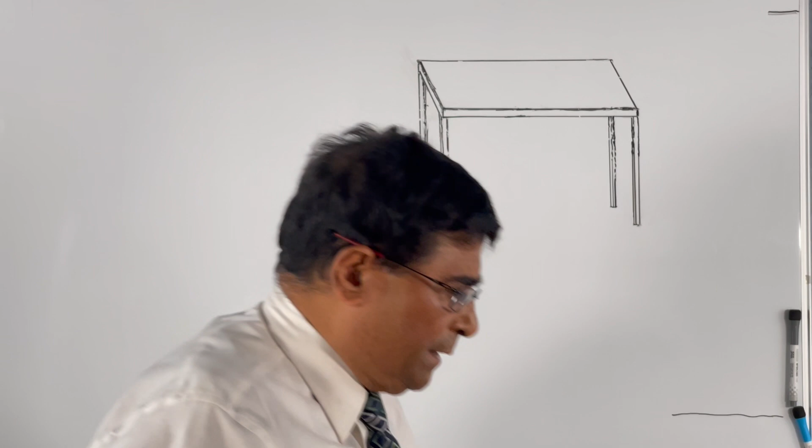This is a table, just an ordinary table. This table is not a structure. It can take load from the top, but if you push it from the side, it will move. I have already drawn this picture of a table on the board. But I want to make this table like a structure.

What I should do: if you put a load from the top, it will take the load directly to the ground, say it is the ground.

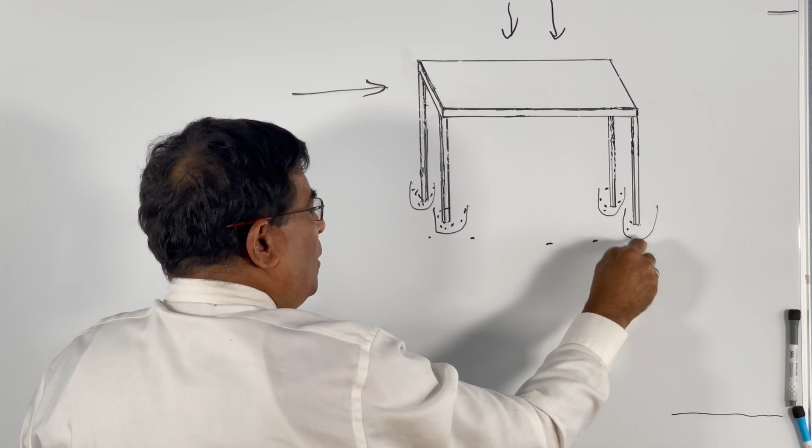But if you have a load from this side, lateral load, it will move. To make it stable, what I am doing is having some holes on the ground, and I fill it with concrete. When the concrete settles down, it will look like a structure, meaning it can take the load.

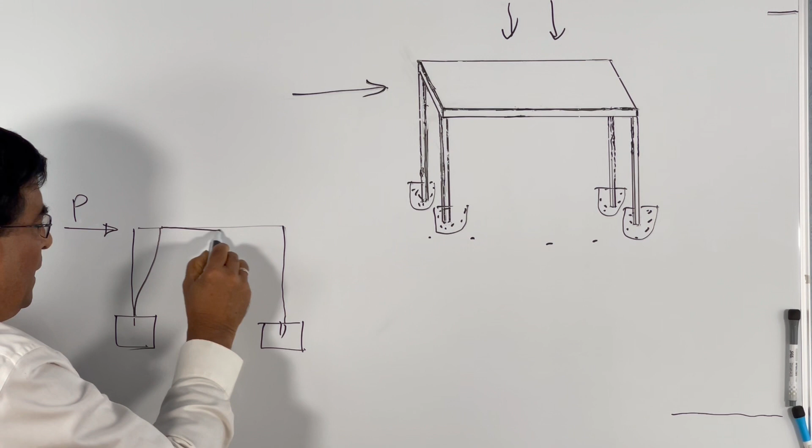Only problem is this joint here and there. To strengthen the joint, if I take this frame separately, suppose this particular part is something like this. When I put a pressure force there, P is the force, then it will try to sway like this. So that means these are not strong enough to take this load, this sway.

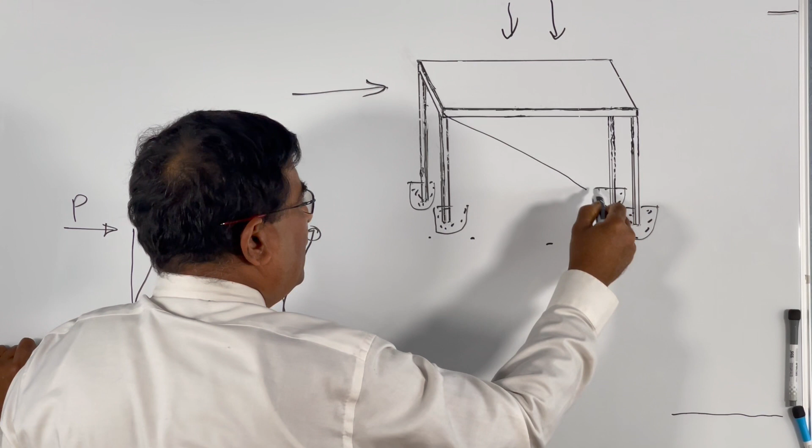To strengthen it, what I will do is connect this one with this place, connect this and that with some members. This member is called, I call it, bracing.

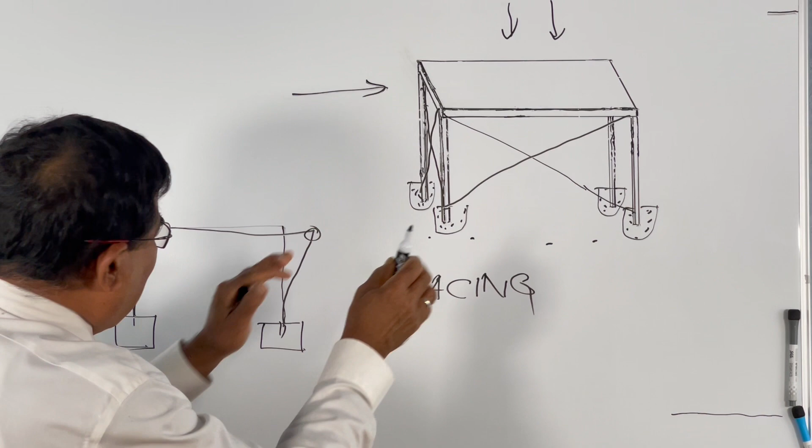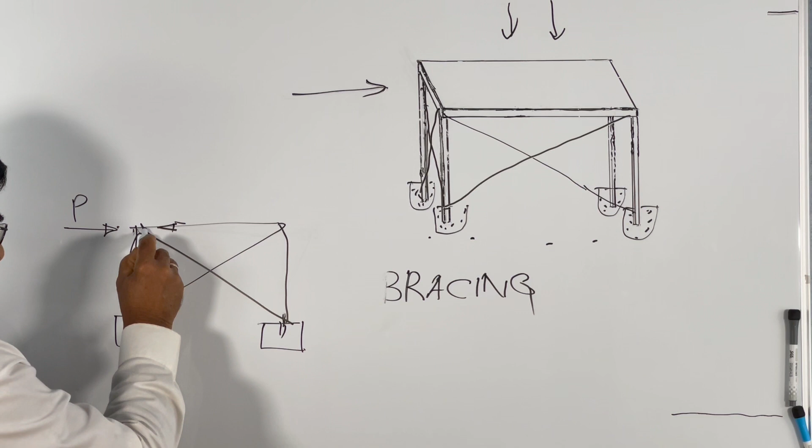So what the bracing does, it doesn't let it sway and move like this. What it will do is be like this, if you draw it properly. The force is there, part of the force will go here, part will go there. You see, I am drawing these arrows opposite to this force. Okay, watch it.

This is a force. If it is like this way, it will oppose this side. This will be something different, this one is something different. I'll draw it and explain. What happens is this P, part of the P will go here, so you can say R1, and part will go R2. So R1 plus, if this angle is theta, R2 cosine of theta equals your P.

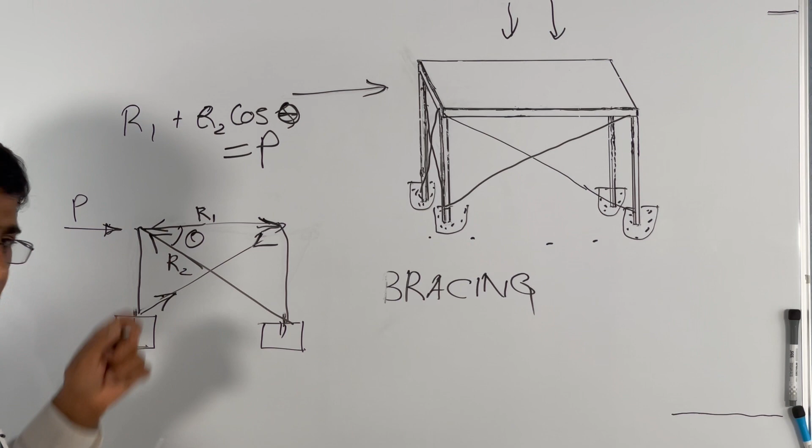That means P is resisted by these two members. These are the reactions coming on the member, that is the member forces. How do I know this? Because when you have some member, if the arrows are like that, we consider that member is in compression. This is compression. And if it is away from the joint, it is tension. Now here, this is compression, this is tension. How do I know it?

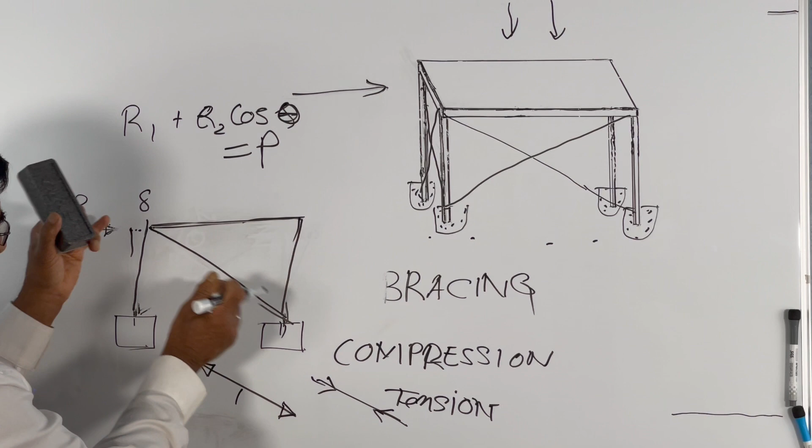Take this case. When there is no member like that, it will move like that, right? This is going like this, sway some amount at this point. So when I connect it like this, what happens? The distance between this and that shortens. When I add this member, it tries to push this member because it tries to make it short. So this member pushes it back. That means when the member is under compression or pushing inside, there's compression, so I know this is in compression. But the other side, it is lengthened. The distance from here to here is increasing.

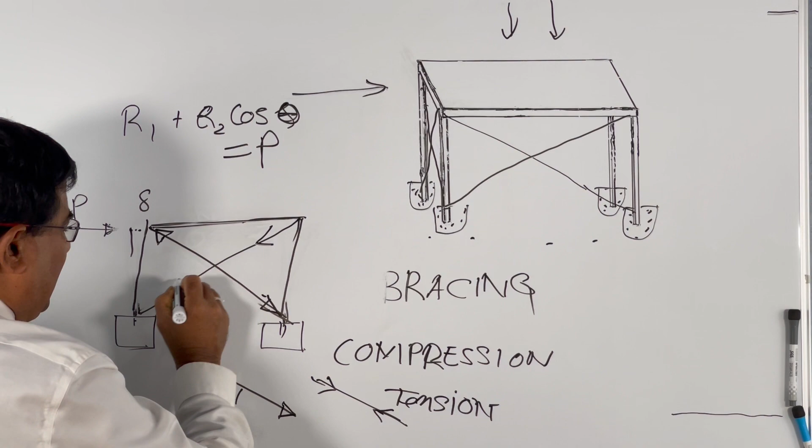When I put the member like that, what will happen? This member will try to elongate by this action. So it is under tension, it's pulling. So this is something like that. By looking at the behavior of the structure, we know the characteristics of a particular member under the load. I will explain about this.

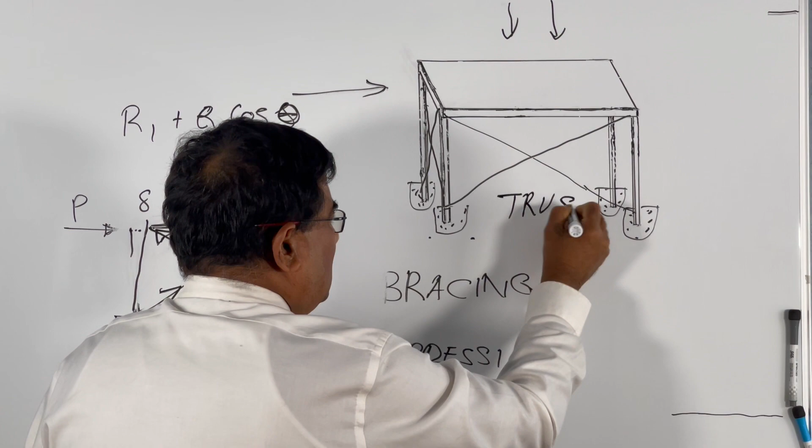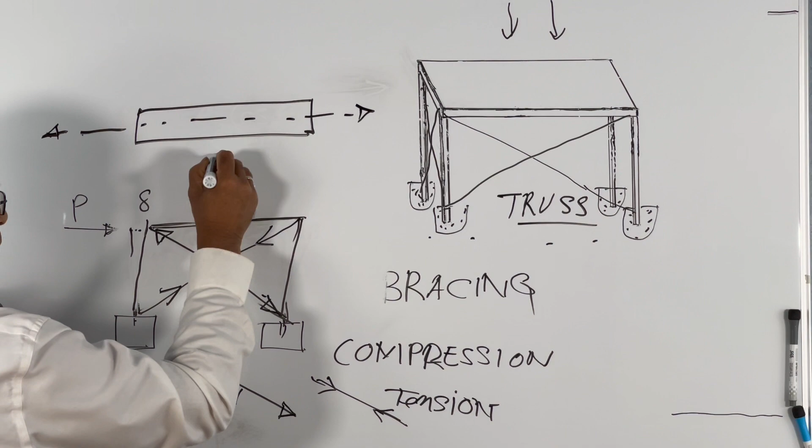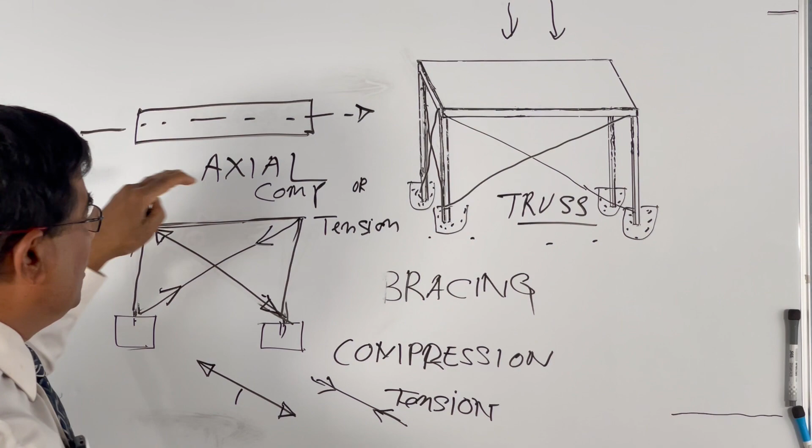This is a truss section. This type of member, when I add this frame, this is a truss section. Truss section is something like that: when the force is transferred through the axis of the member, suppose this is a structural member, when the force is along the axis, this is called axial force. It doesn't matter if it is tension or compression, it may be either. In the case of a truss structure, all the forces are axial, either compression or tension. This is the characteristic of truss.

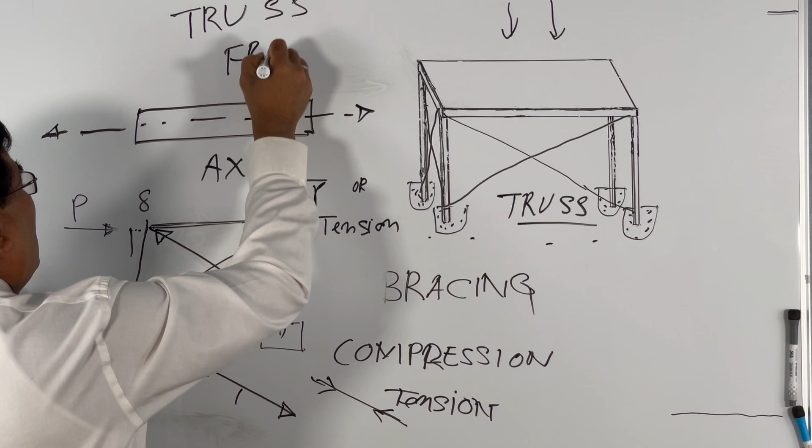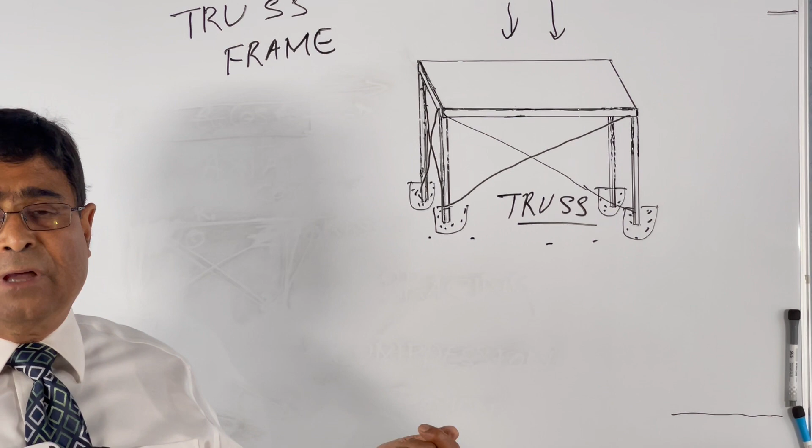We have got truss and frame, which I am going to explain now. What is frame? This is a truss, this side with the bracing we make it a truss. But you can consider this is a building, the whole thing is a building, not your table. Just a table demonstration, I am showing it to explain. No one will have a table as a structure, believe me, because people have structures for some purpose. This small table, if you fix it like that, it has got no use, nobody is going to have something like that. So consider this whole thing is a building.

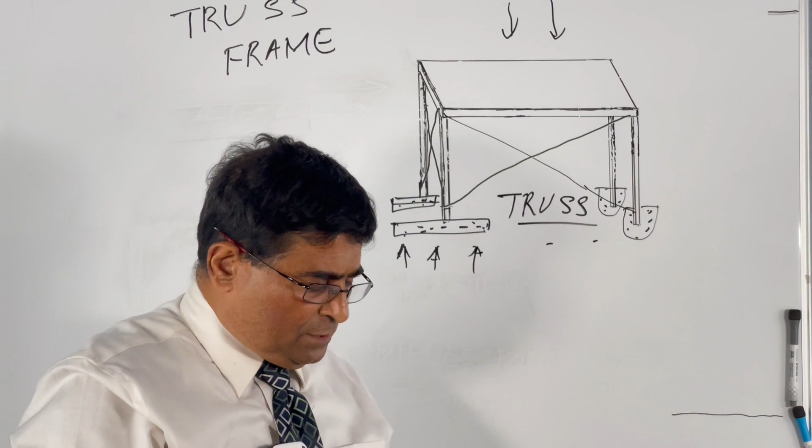In a building, what do we have? We have got a foundation, and that foundation will be made wider a little bit, because the loads coming from a building are very high. We make it like this so that it distributes to a wider area, so that the reactions from soil can easily take the load. There should not be punching. Punching means if it's going through the soil, something like that, it is not allowed, so we make it distributed to a wider range. So whatever, this is the foundation, similarly this is called foundation. We make it wider.

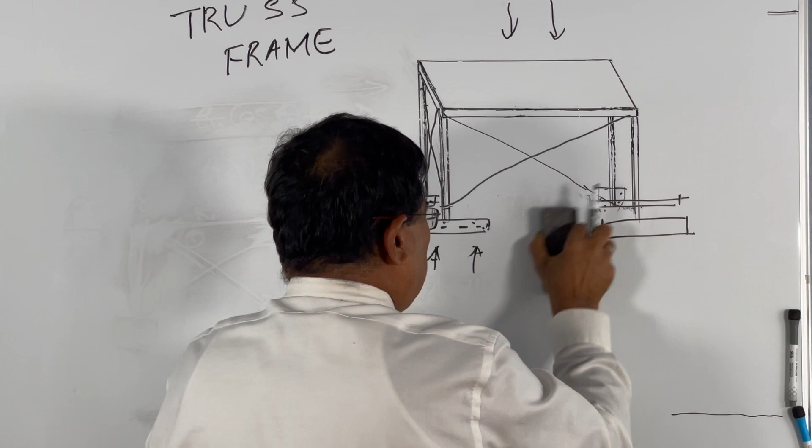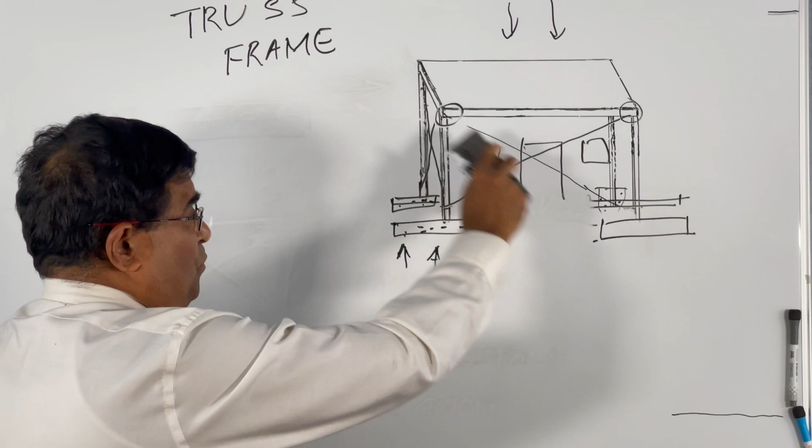But one thing, in a building, you need to have doors and windows. If you have a bracing like that, there's a conflict - you can't have the doors and windows. So what should we do? We have a special arrangement: we make this joint strong enough without having bracing. We cannot allow bracing in that case, in a building.

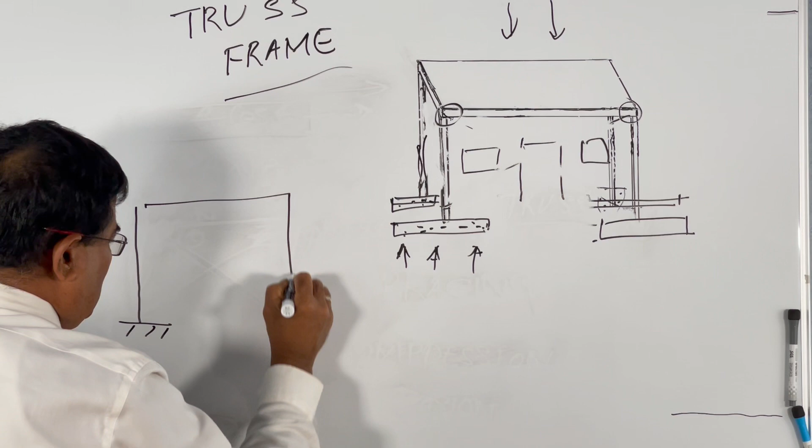So what happens? This type of structure without bracing is called a frame. The frame is something like that. This is a moment resisting joint - there's a joint from this member and that. So what is the characteristic of the joint? When you apply some force, the angle between this member and this vertical member is 90 degrees. This is also 90 degrees.

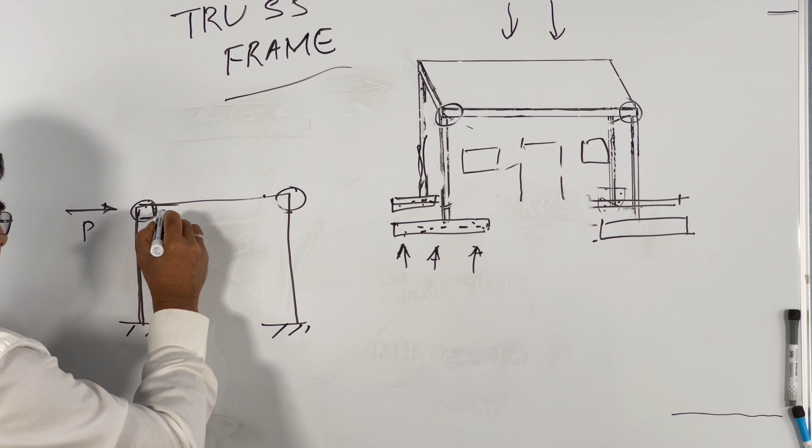So what happens when it's under load - it will sway, like this. But the angle between this remains 90 degrees in a frame. So it will be deflecting like this. This angle remains 90 degrees.

That is the characteristic - when you do not allow rotation, that means there is no difference in the rotation between one member against the other, then a moment is developed. Resisting moments - I will come to that later.

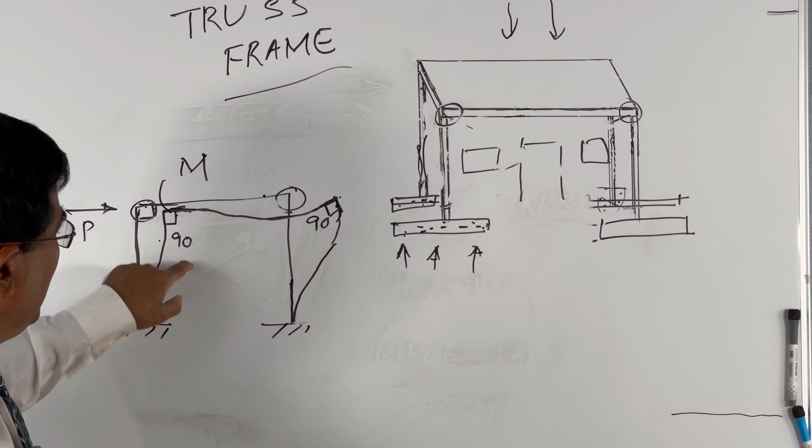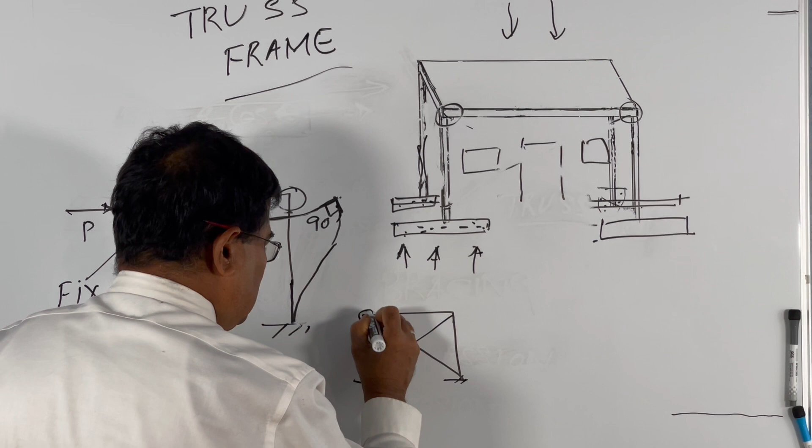But this is the difference between a frame and a truss. The frame, this is fixed - in most cases, sometimes hinged in special cases, but mostly fixed. But in a truss, you see, this is not moment resisting - we consider them hinged. They can rotate; the relative angle between the members may not remain the same. So that is the difference.

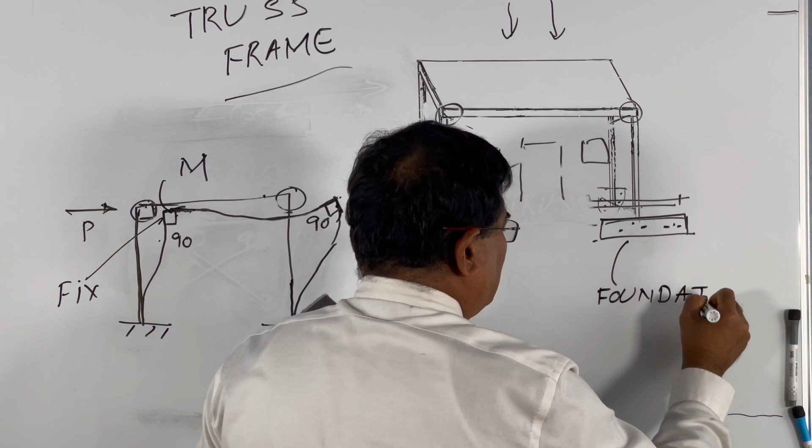Now, as I told you, suppose this is the building. In the building, as I told you, this is the foundation - we call it foundation, meaning it takes the load and transfers it to the ground. What is the name of this? This is column.

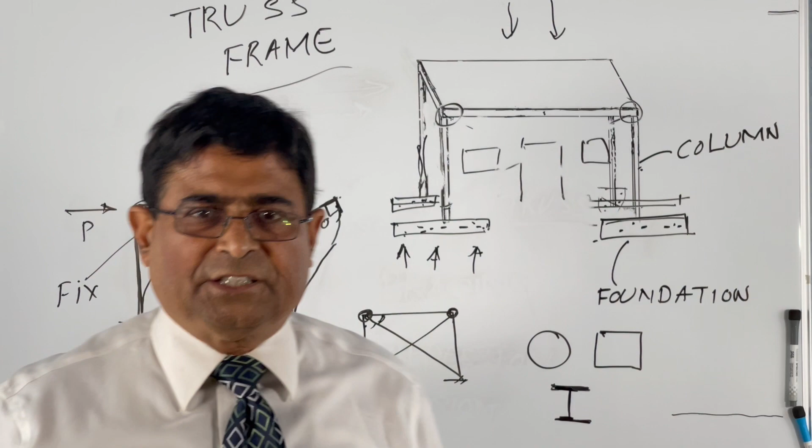These are members. The column may be circular. If you have the cut section, it may be rectangular, or it may have a shape like this if it is steel. There is the major axis, minor axis - all those things I will discuss later.

So this is a beam. If it is concrete, usually concrete we have a rectangular shape - this is depth, and this is breadth. Usually the depth is more than the width or breadth. Then we may have this one - this beam may be of steel, mostly a section like this. This is your beam.

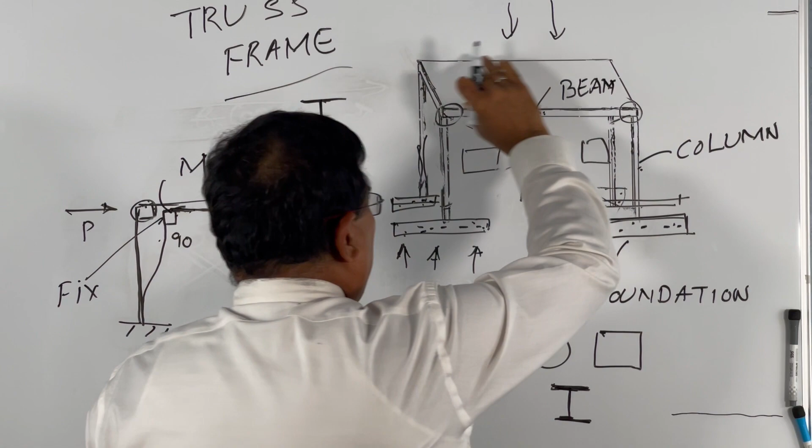And the top part, which covers the whole building, is called slab. Now what happened? This is mostly in slab - it is made of concrete in most cases. In bridges also you will find the concrete. The slab is always concrete, but the beam may be of steel or concrete.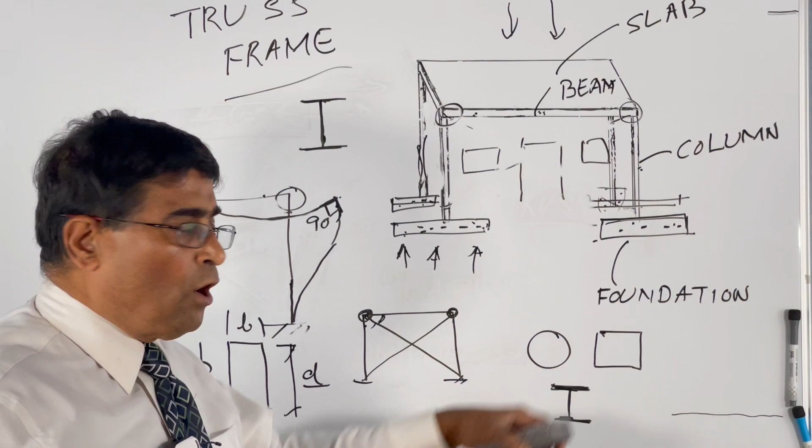And the columns also, as I told you, may be steel or concrete. And foundation is mostly concrete. There are different types of foundation. This foundation I am showing you is called shallow foundation.

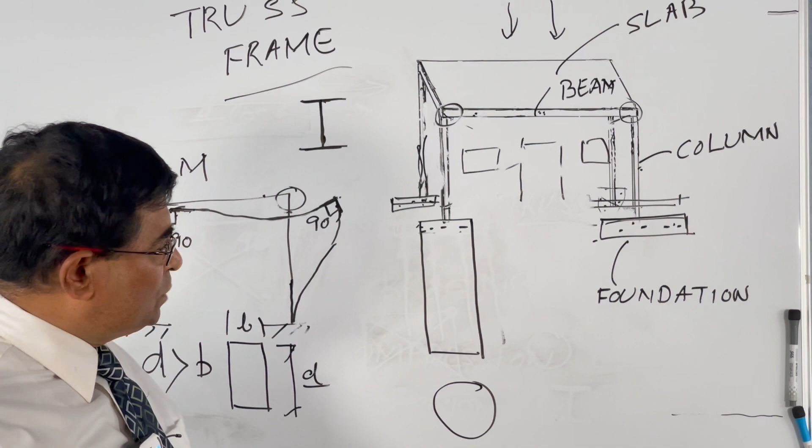It's shallow, but we may have deep foundation also - we have piles underneath. If the soil condition is very bad, we use piles, called deep foundation, or we can have caisson or drilled shaft. This is circular in shape. In bridges you will find mostly the drilled shaft or the piles. This is a drilled shaft.

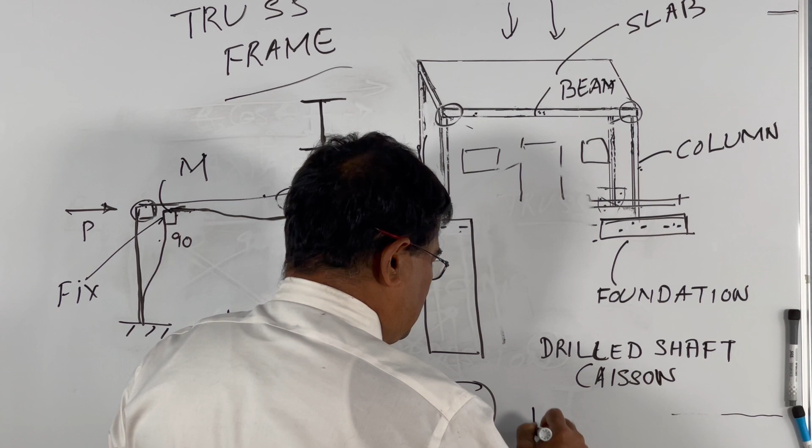Or caisson, and piles. This is also called caisson. But piles are also used in bridges, and if the soil is good, we go for shallow foundation also in bridges. This is all about structures.

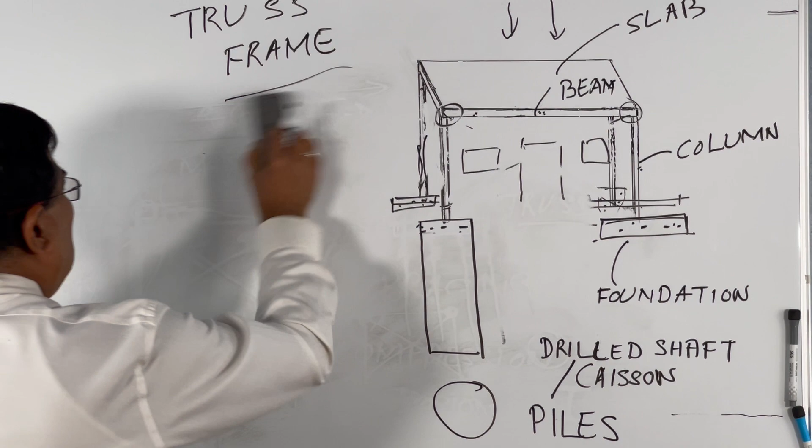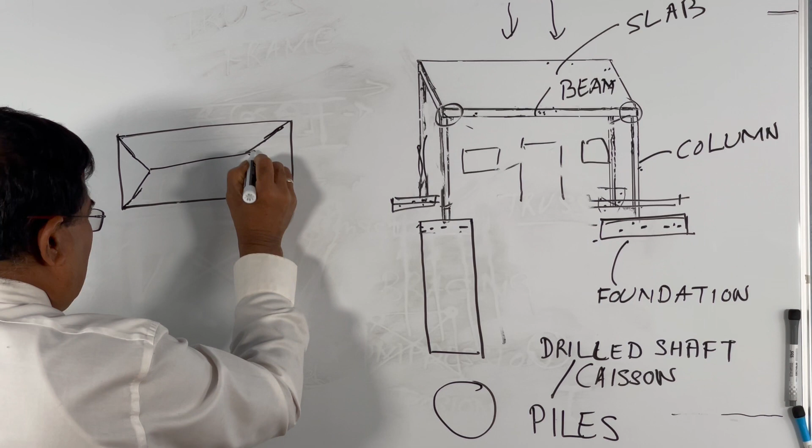So what happens - you see an interesting point. This slab, you see, the top part is a slab. I am drawing the slab in this shape. What happens? This slab's load goes to the beam. How? If you divide this angle, 90 degrees into 45 degrees and 45 degrees, these two lines will meet here, these two will meet there. If you join them, this part will go to this beam, this part will go to the beam here, and this part will go to the beam there. This is the tributary area.

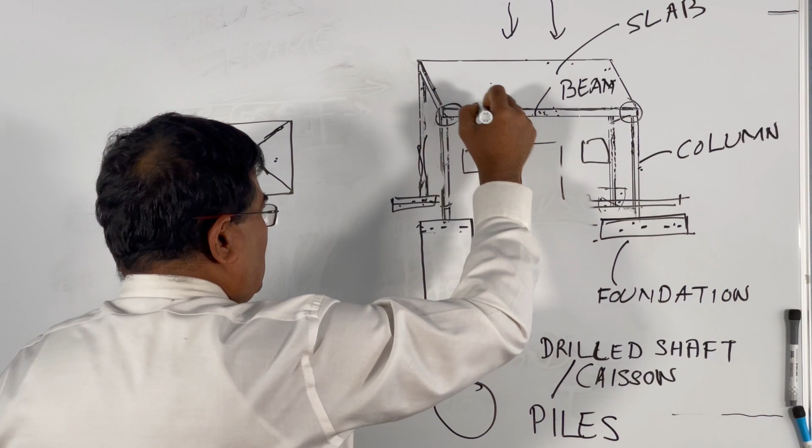So what happens - the load comes from the slab to this beam and that beam. That beam eventually transfers the load to the column, and the column eventually to the ground. So the way the load is passed from top to bottom, the path it follows is your load path.

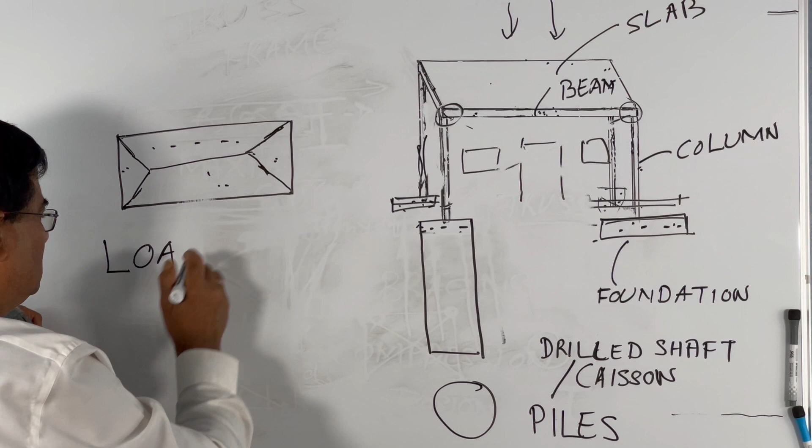Load path is the load that comes from top all the way to the ground, where it follows. So here from the slab, it goes to the beam, transfer the load to the column, goes to the foundation. Why is it important?

It is simple. In some cases there are primary members and secondary members. Take the case of a bridge. There are two big girders looking from top. So there are some cross floor beams also, then there are some stringers. Stringers means smaller beam. This is the bigger beam, and these are floor beams.

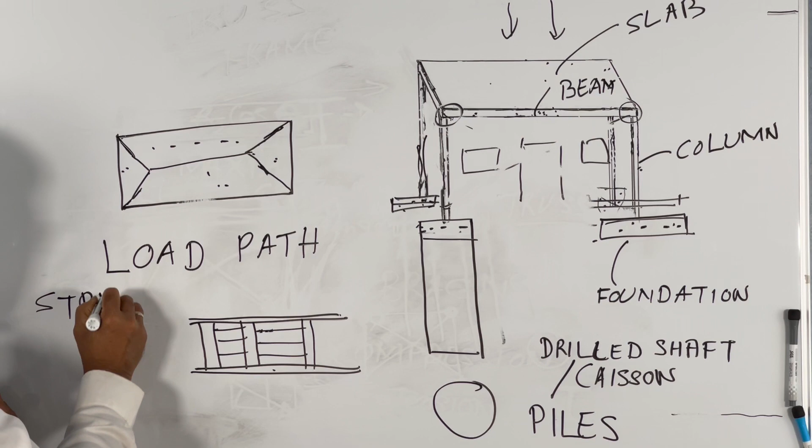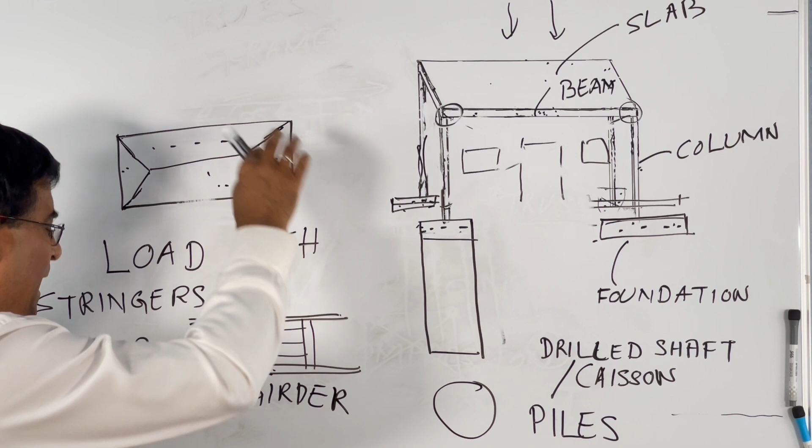So from the top, this slab, the load goes to these beams called stringers. The stringers pass the load to the floor beams. The floor beam transfers the load to the girder. So this is the load path. From top, the slab passes the load to the stringers, stringer passes the load to the floor beams, floor beam eventually passes the load to the girder. So this load path is important.

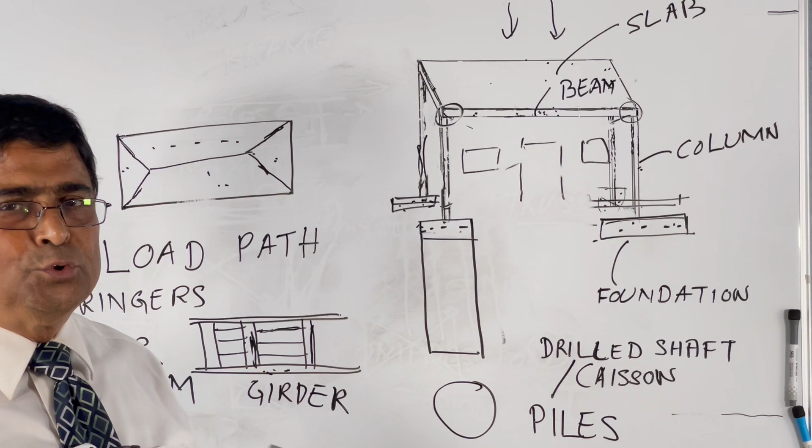Once you know how the load is transferred, it is easier to understand, easier to analyze the structure. You know which is the primary member, and these are secondary members. We should be careful about the primary member, because all the load will be carried by it. If the primary member fails, everything goes down. That is very important. So this is all about load path.

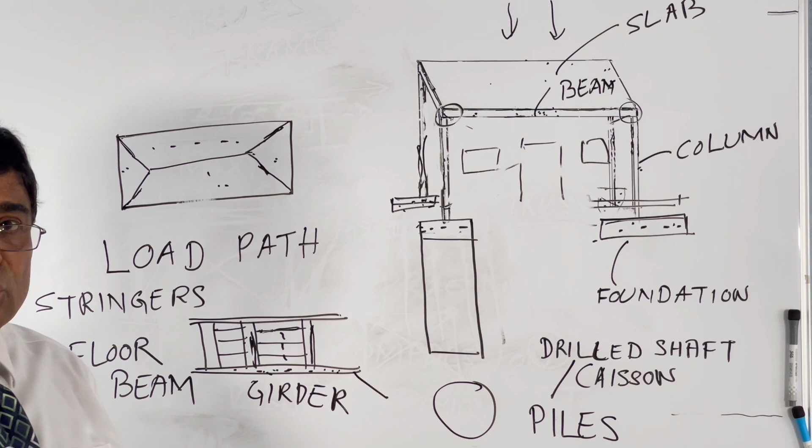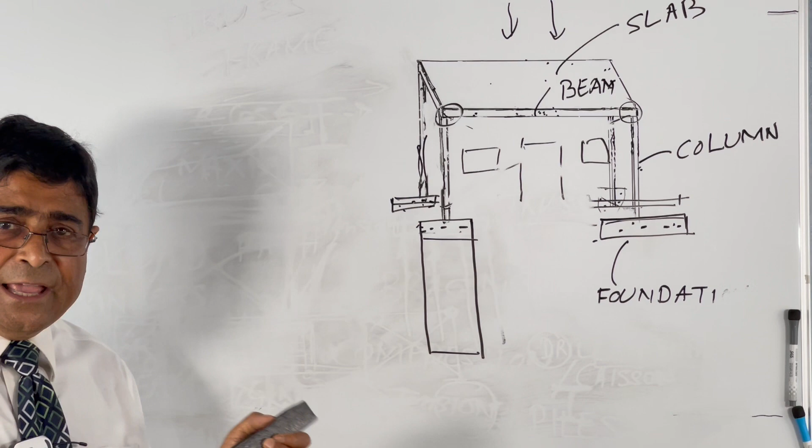Now, this is all about the structure, but why is structural analysis important? Why is theory of structure important? I explained the structure, so now theory of structure. What is theory of structure? That is important.

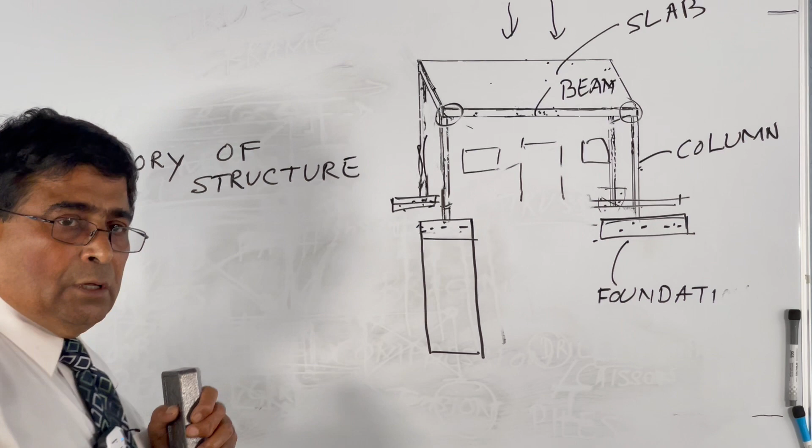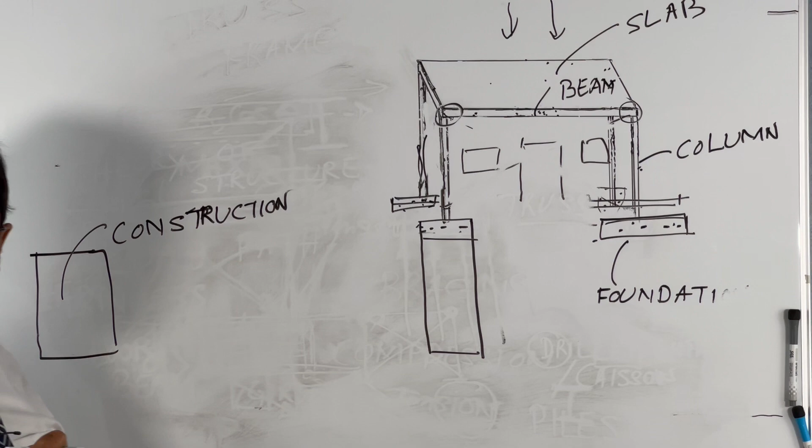Suppose you have a construction, you want to construct a structure. This is the construction part. You want to construct something, some structure. So what do you need for construction? You need some drawings. What are these drawings? These drawings are something like this.

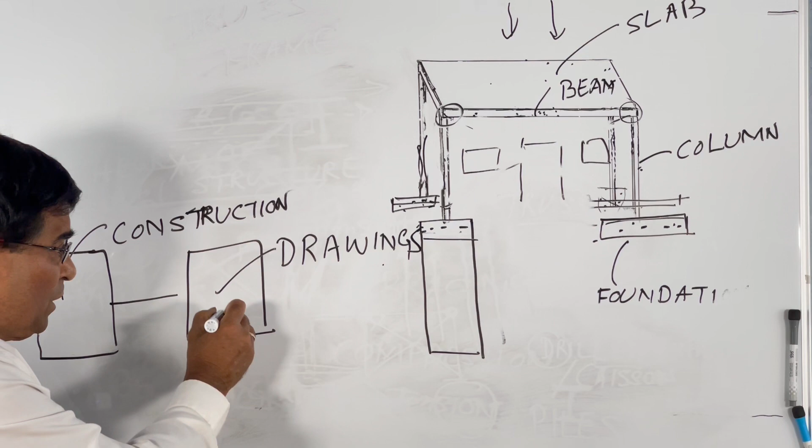This is the drawing we, in our company, made with the help of a technician, a draftsman. So these drawings we need for the construction. Otherwise how will the people who are constructing know how to construct, what is the size of the members, what are the dimensions of the members? They always follow the drawings. So when they follow the drawings, what will they do?

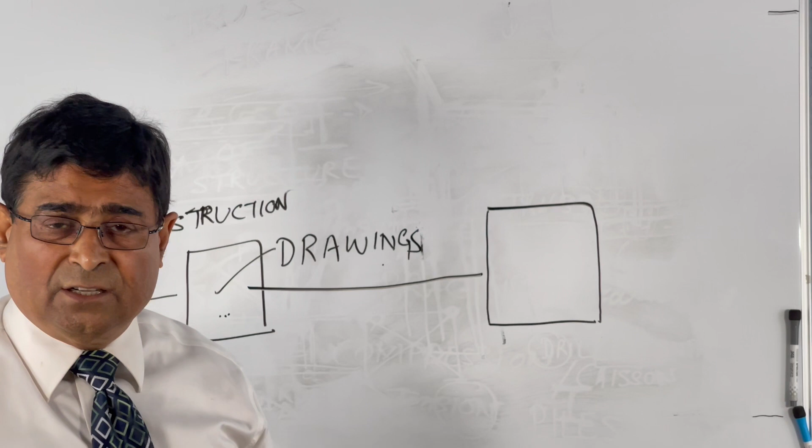How are the drawings arrived? How can you make the drawings? Drawings are drawn by some engineers, right, and a consultant. I'm a consulting engineer, a design engineer. So the consulting engineers or designers, what they do is they have the dimensions of the structure: length, breadth, width, height, whatever it is, in a bridge case the span, all these.

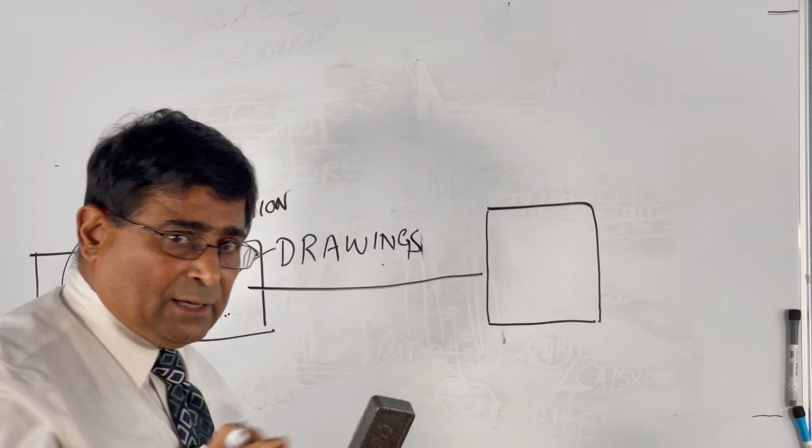What they will do is have a computer model. They put it in the computer. There are different kinds of software. They put it in the computer, and the software will model it assuming some member size. And they analyze it, it's called analysis. So at this stage, first you assume the sizes, then analysis.

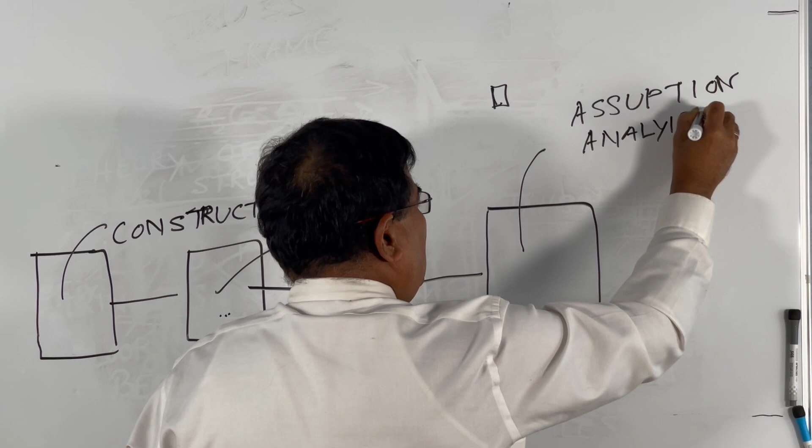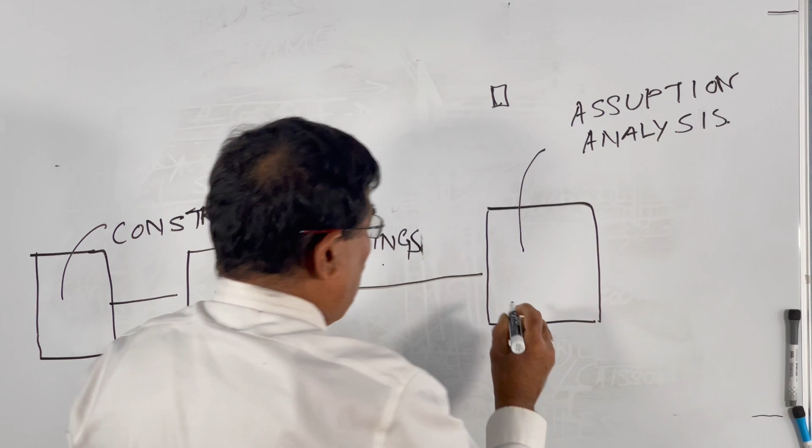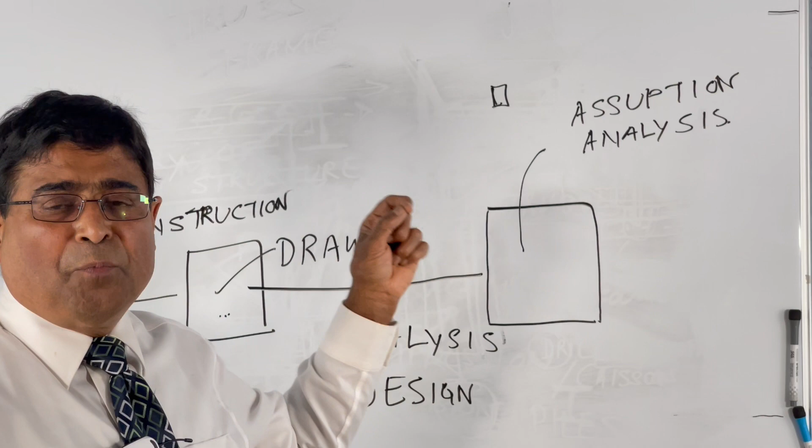Then when the analysis finds the members assumed are not sufficient, they increase the size and analyze again. So this is analysis. And design. What is design? Design is finding out the member size, the rebar, or whatever is needed there, that is called design.

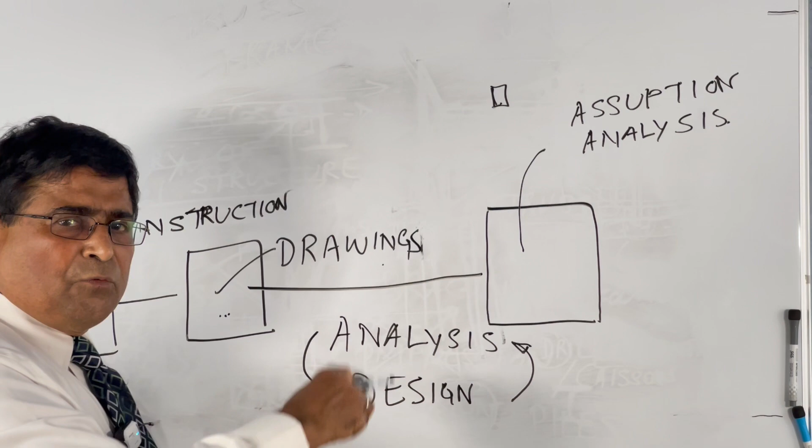So this goes back and forth. They analyze it, then after they design it, if it is not safe it goes back to analysis, then again comes back to design. This process goes on for a while. Eventually they arrive at a safe structure, meaning all members are safe, they will not collapse, and deflections are also reasonable.

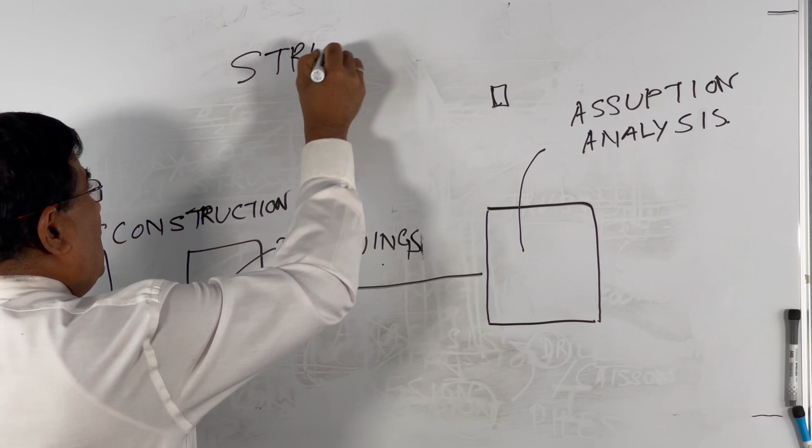Deflection. Two important points you should remember in structural analysis: stress and deflection. I will explain what stress is and what deflection is. These are the two important things. The stress is, you see, when you apply some force on a member, on a structure, suppose this is your structure, you apply some force. I told you earlier that there is a force here, there is a force there.

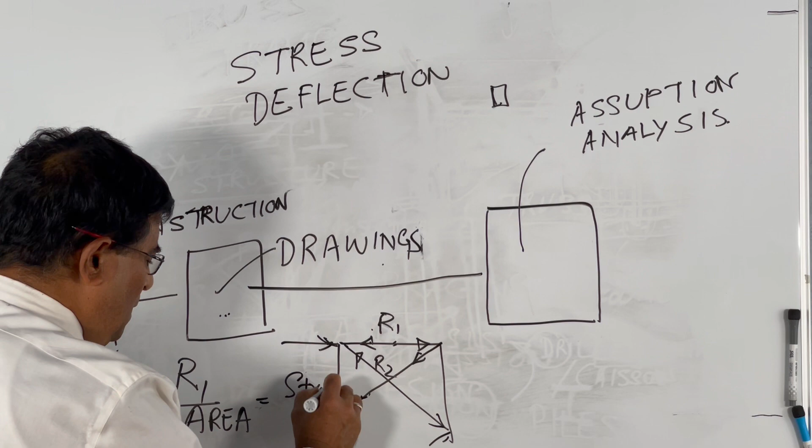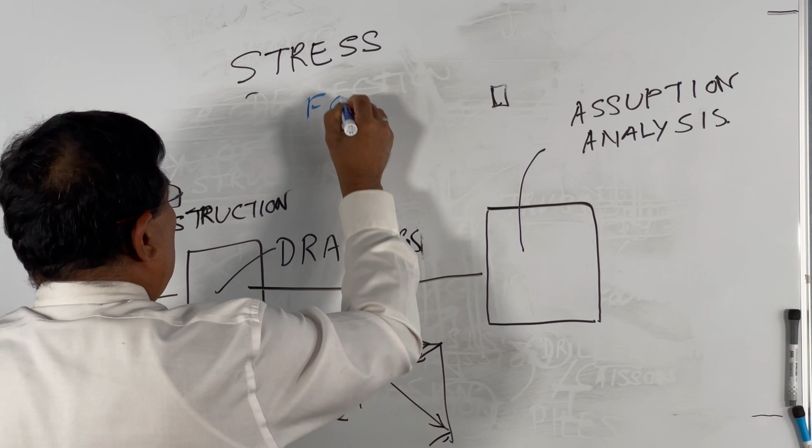So what happens? This force, I told you, is R1, this is R2, okay. So R1, if you divide by the area of the cross section, that is your stress. The stress is actually force per unit area.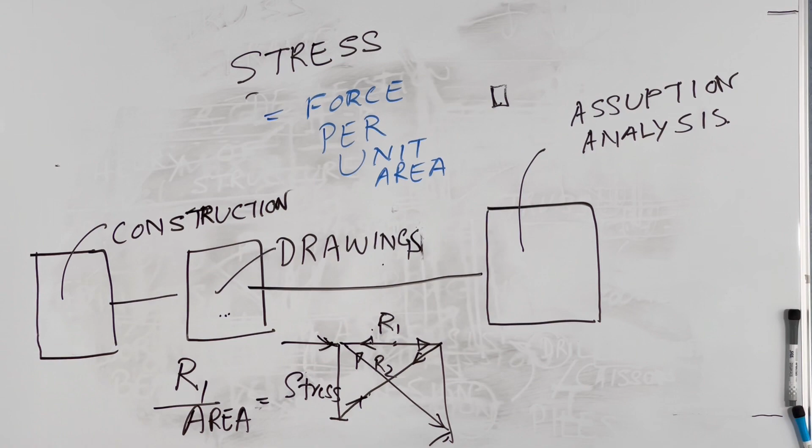This is the definition of stress. And deflection is, if you have something like this, some beam, it goes down, right? When I bend it, the part here is the maximum going down.

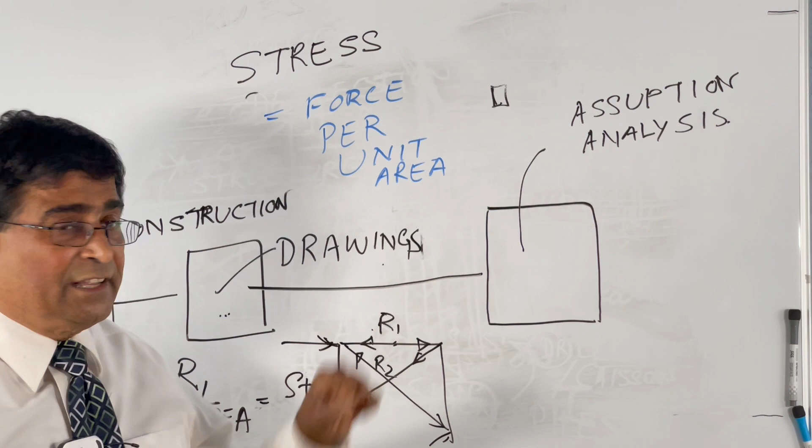That is the deflection, how much it deflects. This deflection and stress are both important in structural analysis. Structural analysis means finding out the force and stresses, stress and deflection, and deflection.

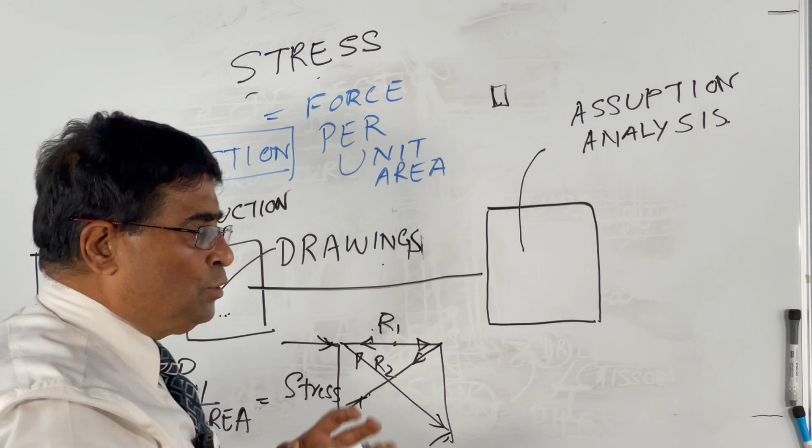You need to know about the structure. You need to know the behavior of the structure under all these loads. Where you find that, that subject is called theory of structures.

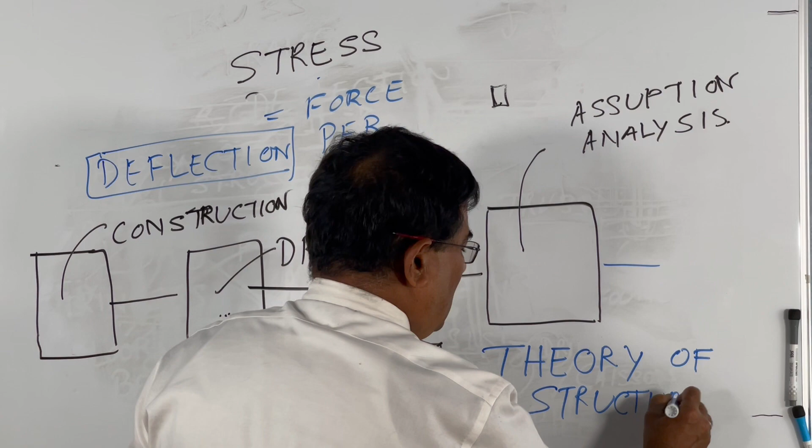What is theory of structures? It gives you all the theories that help you find knowing about the structure as well as analyze the structure, finding out the stresses, finding out the deflections. These are very important for structural analysis and for designing a structure.

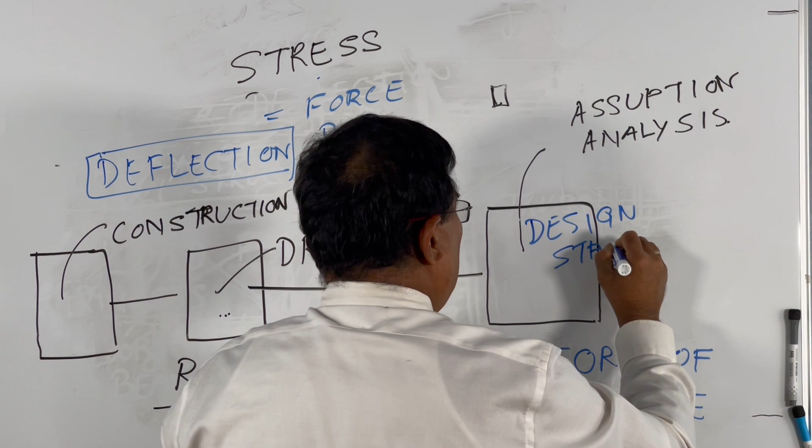So what is there? This is the construction, this is drawing, this is your design stage. And this design stage we use both design and analysis of the structure go hand in hand. After that, when we are satisfied with the design, we prepare the sets like this.

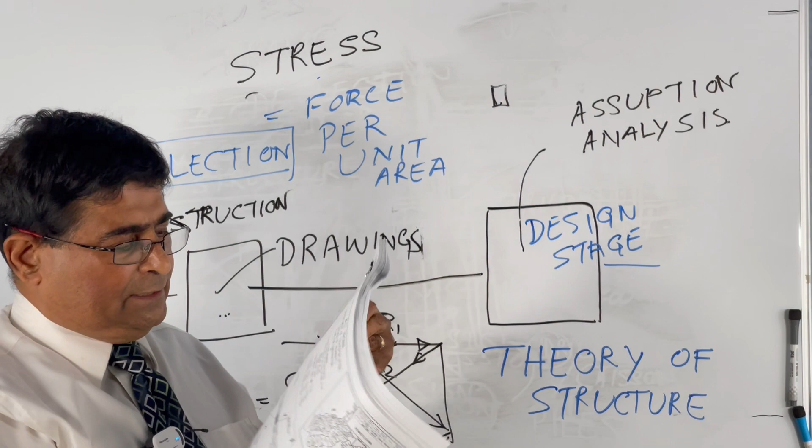We have to have a drawing like this. This is called plan. We call it plan.

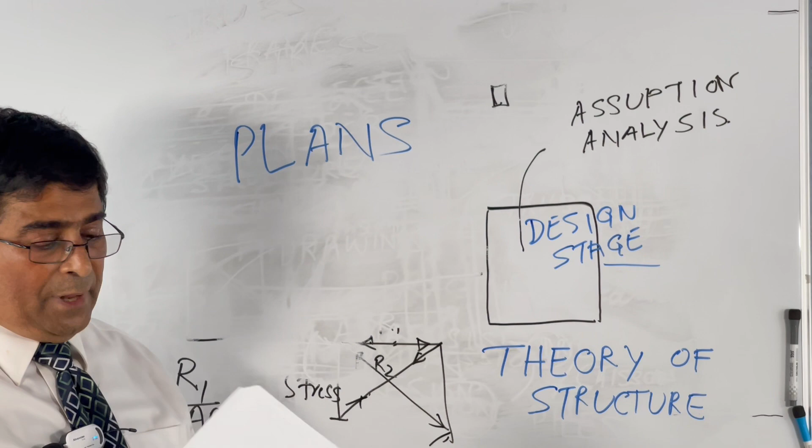These are untitled construction plans. There are many, here probably about 56 pages. You see, after designing, the engineer has to sign. Here it will be my signature, which may say the professional engineer. And here the roadway engineer has to sign.

This is the bridge. It's a bridge of 75 feet span, single span bridge. From here to here, it is 75 feet.

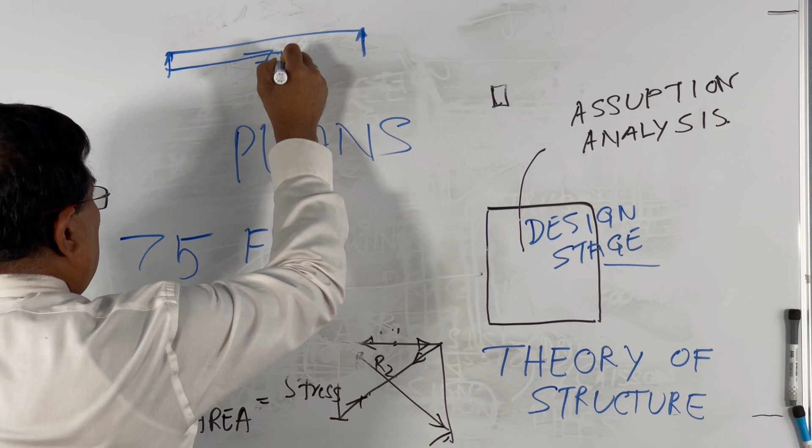Understand? So we need to come up with a plan like this so that the construction people can easily construct it. How can you do it? An ordinary person cannot do it. We should know about the structure, we should know what are the stresses and deflections, because the structure cannot exceed the allowable stress.

That's important, otherwise it will collapse. I will discuss in a later class what is allowable stress, how far we can go, the different kinds of design, all this. Then the deflection. In bridges, we cannot allow the deflection to go beyond L over 800. This is the empirical formula.

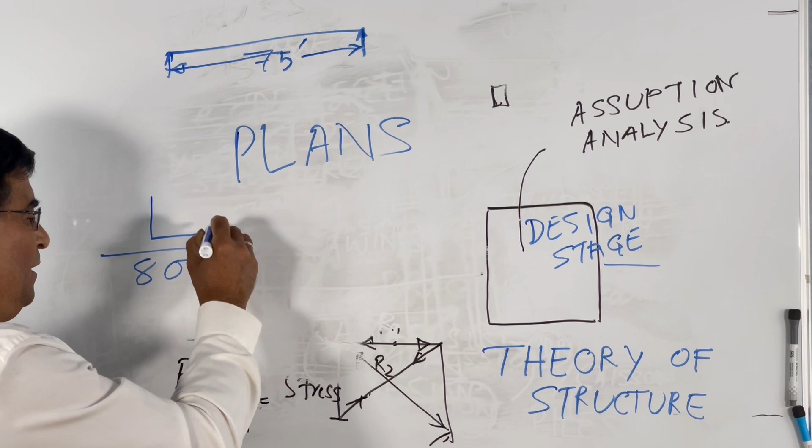So probably in India or other countries where the metric system is used, they might have a different equation. L is the span in feet and 800 is a number they found out. And this is the deflection, the deflection due to live load.

There is a way to neutralize the dead load deflection. I will explain that later when I take the bridge class or during this session. But this is important: we cannot exceed this value, L over 800.

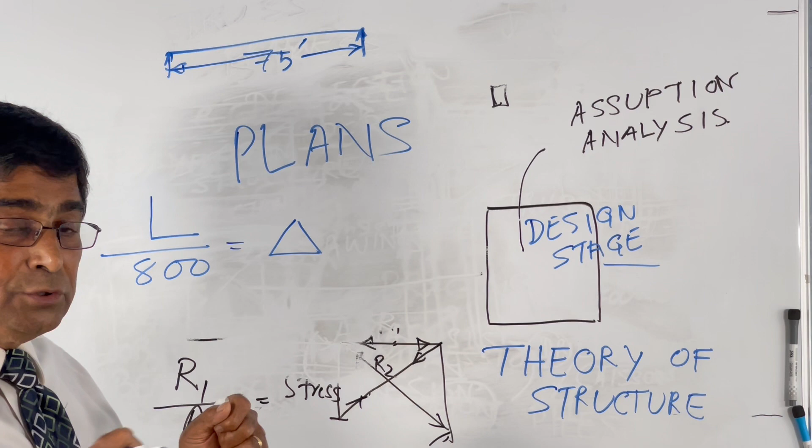What happens if you exceed that value? It is found the driver feels insecure. That means when he goes over it, he feels like he's sinking. So he doesn't feel comfortable, and he will not go use the bridge again. So that is important, we cannot exceed certain limit.

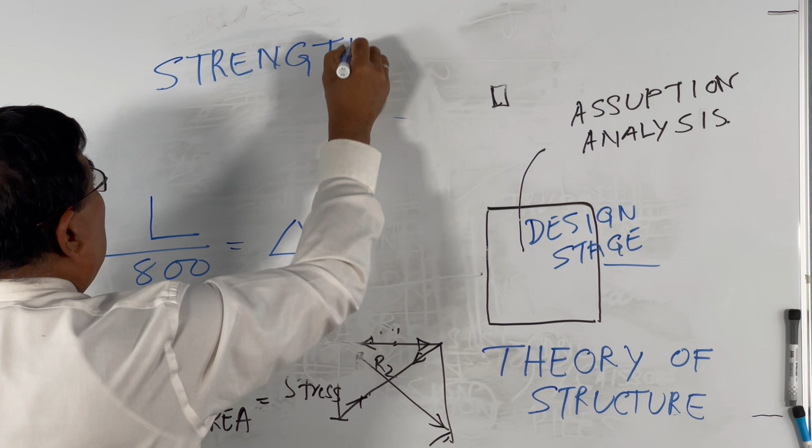There's something called serviceability. So that is the criteria. Deflection is the criteria for serviceability, and the stress is for strength. You see, in design we have got two criteria we have to meet: strength and serviceability.

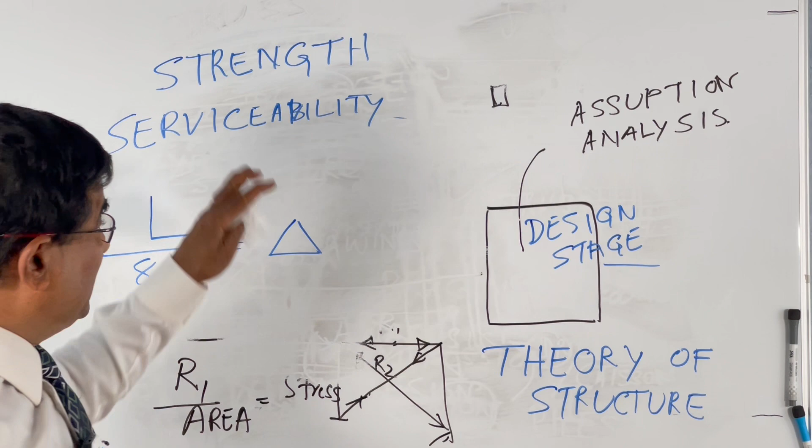So deflection goes to the serviceability conditions, where even in some structures it may satisfy the strength condition, meaning it will not fail. But this criteria governs, that is, there is excessive deflection. When I discuss all this, I will talk about that.

So today I want to conclude at this stage. Next time I will take it from where I left off. So I hope you enjoyed the class, and I hope I cleared some of your doubts.